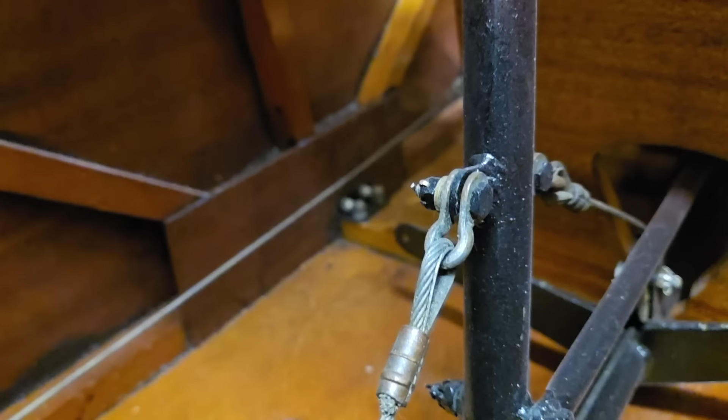This airplane was designed in 1929 by Bernard Pietenpol. And he actually built the airplane with pretty much all common parts that you could buy at the hardware store, things like that. Get the steel tubing. All the controls are welded up yourself. So when you get the plans, they give you dimensions. And with that being said, you weld it up and rig it just like the plans show. And this is what it would look like.

So, instrument panel here for the pilot, as you can see. Here's the seat. Pretty cool, huh? You put a little cushion on there. You can't get too much in there, to be honest with you.

One thing that's unique, or good, I think Jim put these shoulder harnesses in. It's nice to have something like shoulder harnesses in these airplanes. Just because if you have an off-field landing or something kind of hard or difficult, it's going to probably save your head from hitting the instrument panel.

The airplane's made out of wood, so now you can use like T88 epoxy glues, but everything's glued together, and then they put these gussets. And you see these little nails, these are called brads, okay? But they glued it together. And this is a 1970 build.

What happened, the prop came off the Model A, and Dick had to make an emergency landing out in a field. The field, I guess, was going downhill, and the airplane glided more than he expected because the propeller wasn't there. And with that being said, he landed a little bit long, and it tore the gear off. And really, this part of the airplane was damaged quite a bit.

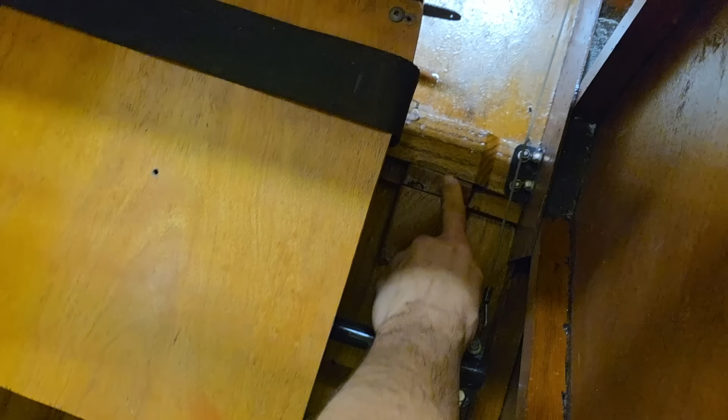The pilot, as you're flying the airplane, the pilot's feet come through here. I'll turn this around here. So your feet come through here, and here's a rudder bar. And the rudder bar is for the main pilot. And look here, they got like a little shim here, so you don't get your heels caught on the landing gear block. So it slides back and forth a lot easier.

It's pretty amazing, in 1929 they come up with this airplane. Here's the back of the instrument panel. I'm going to go a little bit more in depth with this than what I thought I would. But here's all the instruments, and then you'd run all the cabling and the tubes and everything to the engine or to the pitot-static. Let's go around here and take a look.

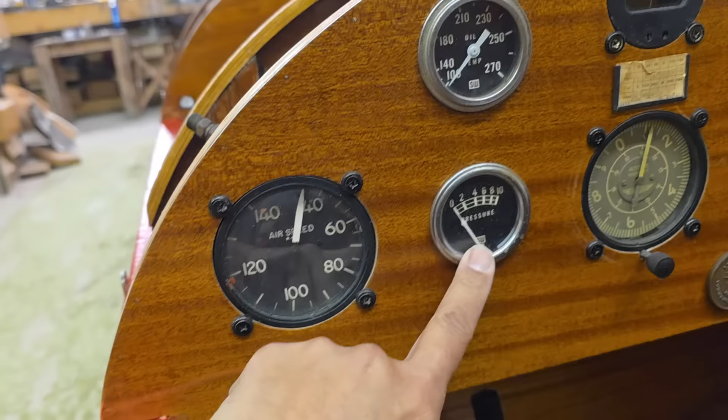We've got our compass, our magneto switch, oil, oil temperature, oil pressure, okay? And then here, since we got a Model A, you got to have water temperature. All right. We got our altimeter here, our airspeed. All right. And there is the almighty RPM gauge.

So it's really a unique plane. It's small. It's a home built. Jim did all the covering here. Come back here. This is the stabilizer on it. It's pretty much a flat surface. We'll bolt through, and then the rudder sets on top. Tail skid. All this looks like it's pretty much built to plans.

A lot of guys are putting tail wheels on it, and a tail wheel, in today's world, makes it more convenient. But if you're flying off of grass, a tail skid is perfectly okay. And around here, we kind of fly off of grass a lot. With that being said, you keep the weight down. Pietenpol is kind of known to be tail heavy. So you really want to keep everything light on the tail section. And having a Model A up front really helps out.

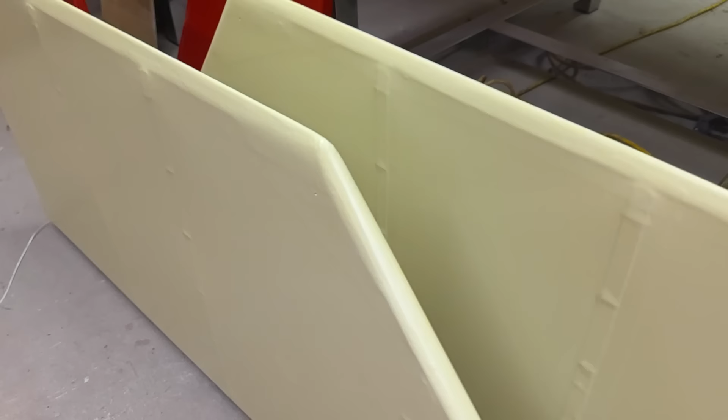Here's the elevators. So Jim put all these back together, tore all the covering off. Here's the control horn for the elevator half. And he covered all this in Stits Poly-Fiber. Here's the fin. I'll back up here so you can see it. There's the rudder.

And what's kind of funny also is I started building a Pietenpol. I had the tail sections done, and I framed up the fuselage. It's actually pretty easy to build and very fun to build. You just put all this stuff in a jig, just like a model airplane. Glue it together and come back the next day and glue some more parts and pieces in.

Here we go. Here's all the cabling for the elevator and the rudder. You see all his tapes here. So anytime there's something touching the fabric, you gotta have a tape on it. So he has these little double tapes or pinking tapes on here.

Here's the front instrument panel. There's nothing there, but a piece of metal will go there. This is where you have the struts go up to the wing, attaches here and here. So Jim said he's going to paint those. Here's the landing gear brackets and also the flying struts, or the struts for the wing. So the landing gear will bolt to this one and that right over there. Pretty cool stuff.

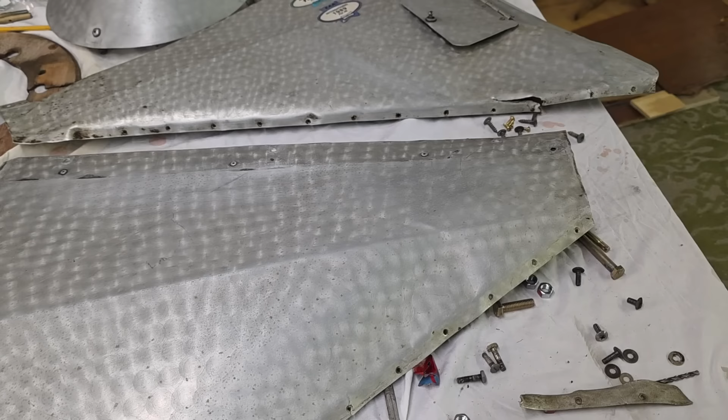So we just put this stuff together just so you can see what it looks like here. So he'll get the bolts and get everything all tightened up and fit it up a little better. So I'm going to move over here and show you the cowling. I didn't have any pictures of it before, and I don't think Jim took any, but he said all this was really beat up pretty bad. Wrinkled aluminum. But Jim did a lot of work with it and beat it, and said he stood on a couple pieces. And if you ever met Jim, he doesn't weigh a lot, so he probably had to do some jumping up and down on it.

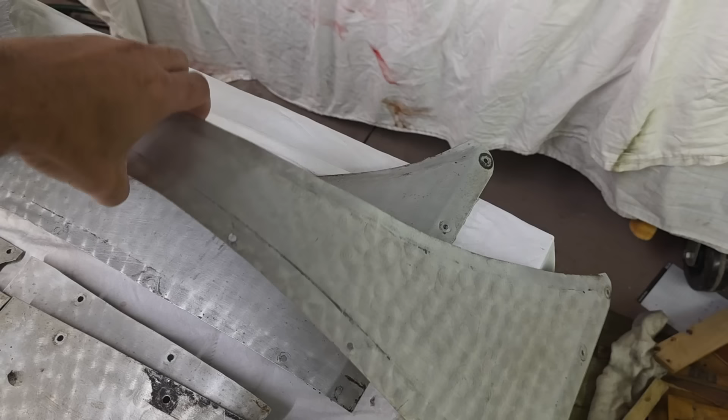And these are just the metal pieces that he actually just worked and fitted back. So these are original here. This is the back of the back cockpit, and it overlaps. Gives a little tapered look there on the instrument panel. Very front nose of the airplane. Here's a piece that was broken. So Jim laid these out here, turnbuckles and things that were broke during the accident.

So I graduated high school in '94. So this had an accident 2 years before I graduated high school.

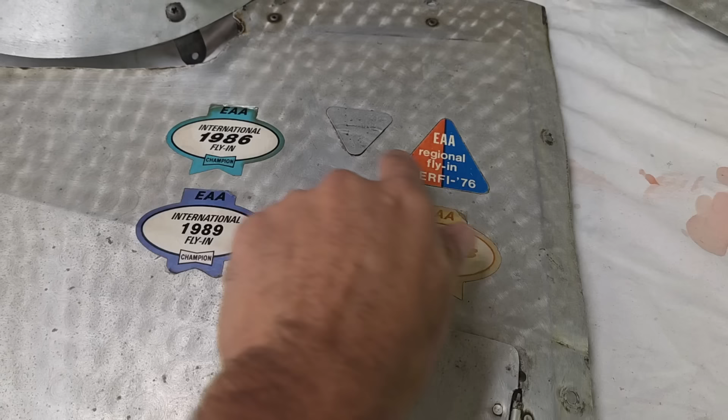Here's some pretty cool stuff he had on the side of the cowling. This is EAA Oshkosh. But look at that, 1986. I never knew it was called International Fly-In. And then this is MERFI. This was up in Marion, Ohio. When I was a teenager, MERFI was called Mid-Eastern Regional Fly-In. This was one of the largest fly-ins in the area.

They had a humongous air show, awesome display of antiques and home builds. It was a very experimental type fly-in back then. This is back between '90 and '94 when I would go there. Two of my friends that we flew with in high school, we would go there. We started going before we could drive, and then in high school we would drive there and spend the whole weekend camping out and everything.

So it was an awesome fly-in. And then I don't know what happened, and the fly-in now is being held in Urbana, Ohio, but it's nothing like it used to be. So Jim had this laying out. This is some of the broken wood. You see this was in the cockpit there. This is where your feet would go through. It's all broken, and Jim had to rebuild all this and remake everything. Look at that.

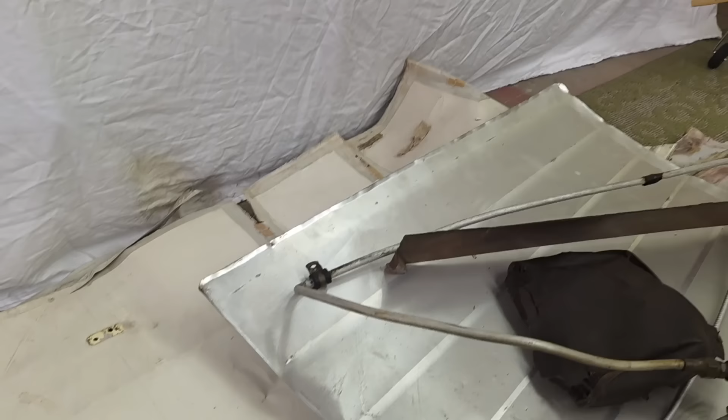This looks like this is possibly the very top of the fuselage. This piece is probably right there. I think that might be it there. So he put it all back together, instrument panel. Here's some of the old fabric. This airplane just sat in the back of a hangar or up in the loft for many, many years. I remember years ago going over to Dick's hangar with Jim, and I'd see the airplane hanging up there or sitting in the back of the hangar. This is probably all Ceconite and dope fabric here, but this is what it was.

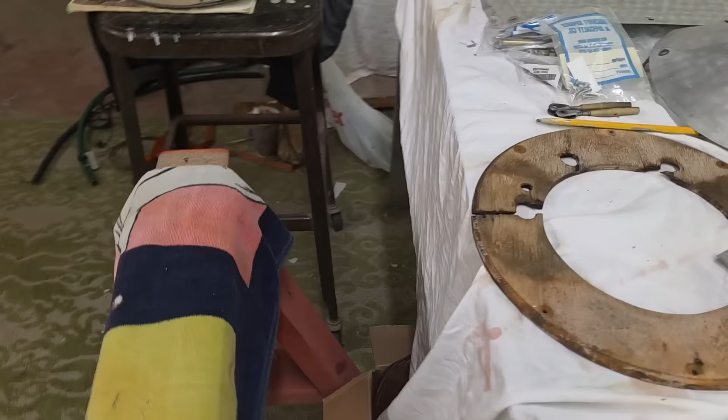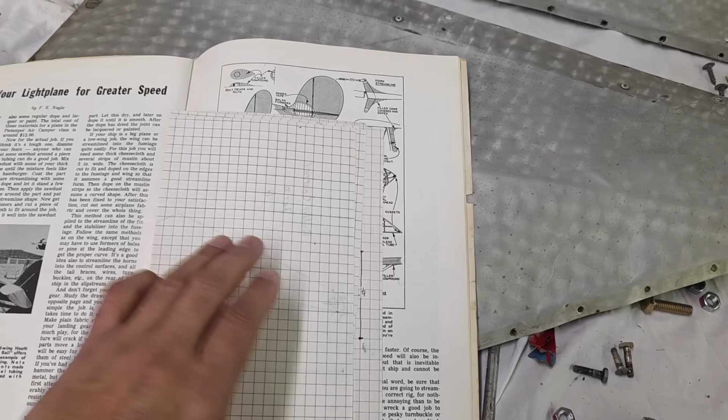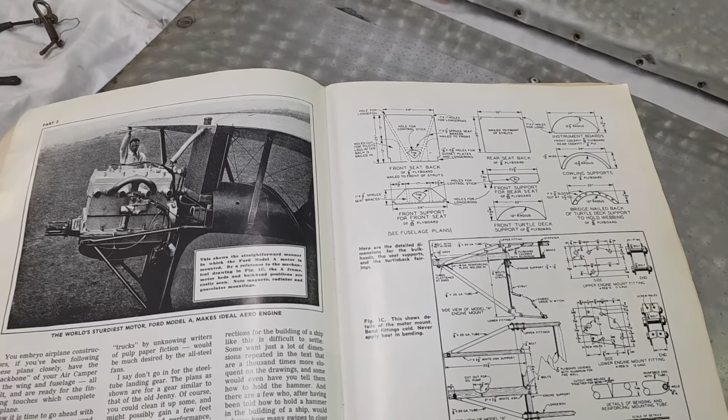And I think we're about done. Here's some cool stuff here. This is like the instruction manual, the Holy Grail for the Pietenpol Aircamper. You can order these online. 1932 Flying and Glider Manual, and you can actually go and buy this. It's not that expensive. I just opened it up here, and it looks like Jim has some notes. It features the Pietenpol build, and look at that. That's pretty cool. I have this book at home, but it's been many years since I've looked at it. A lot of really cool small airplanes. So here we are with the Pietenpol build.

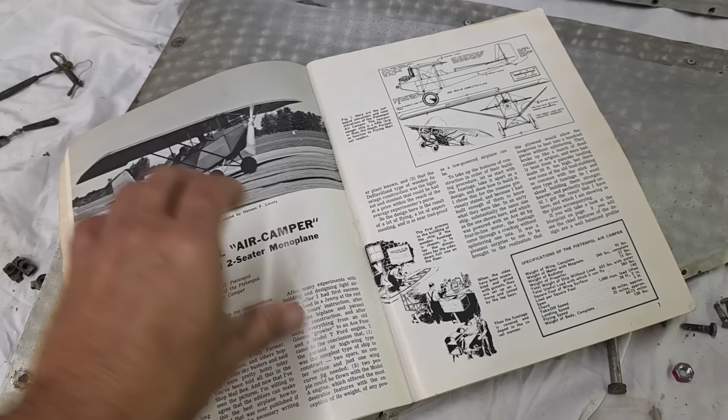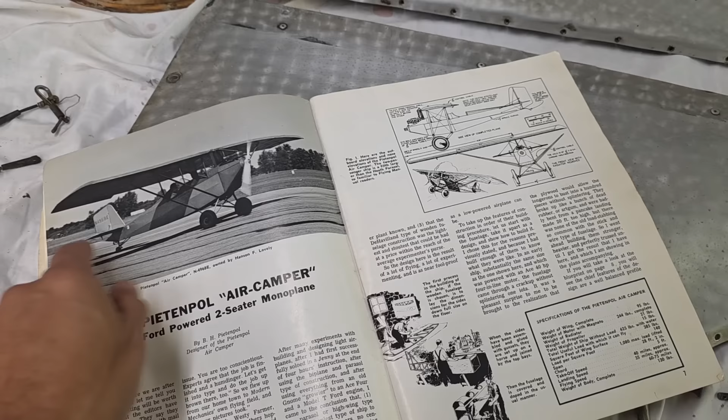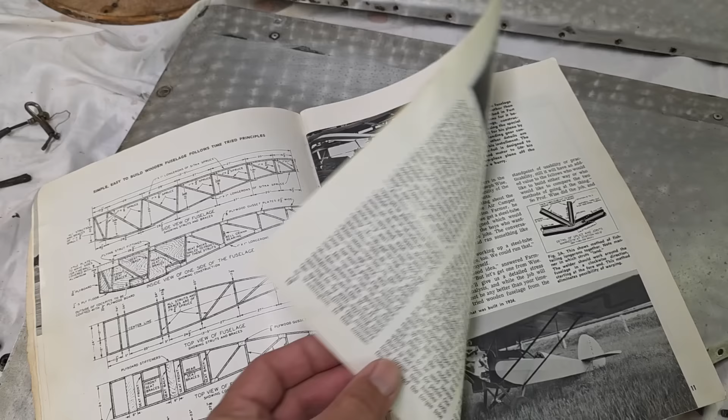I'm not up on the Pietenpol like I used to be. But what was unique about it, I might be misspeaking, and I'm sure someone will correct me, but I believe there was a big show happening maybe in Chicago, and they were supposed to have some pilot show up, and they never did. And Bernard showed up, I think with 2 Pietenpols, and they didn't even know he was going to show up. He kind of wowed the world with this airplane. This is what it would look like originally. They've had multiple different engines put on the airplane, Corvairs, radial engines, but it was designed around a Model A.

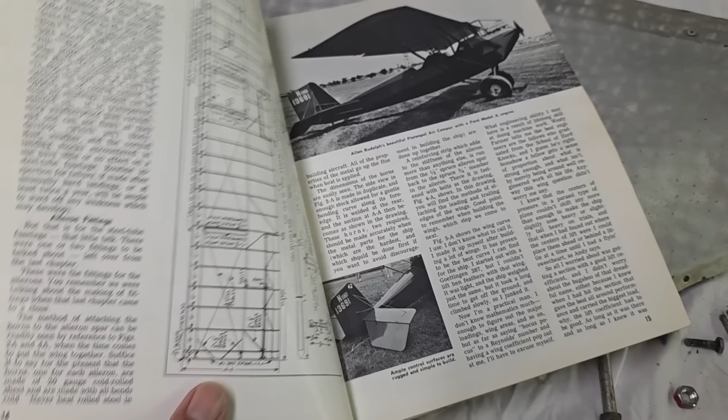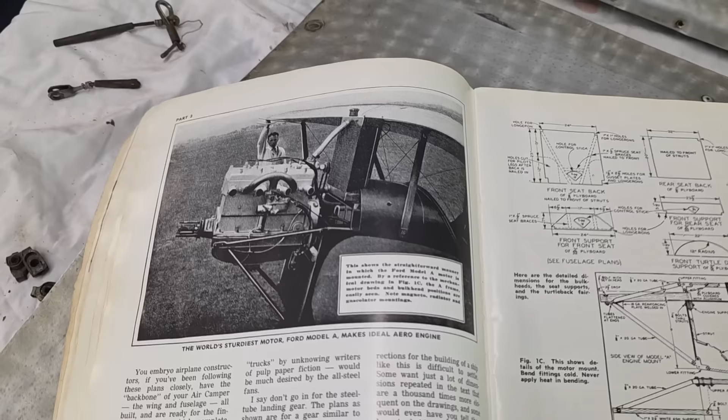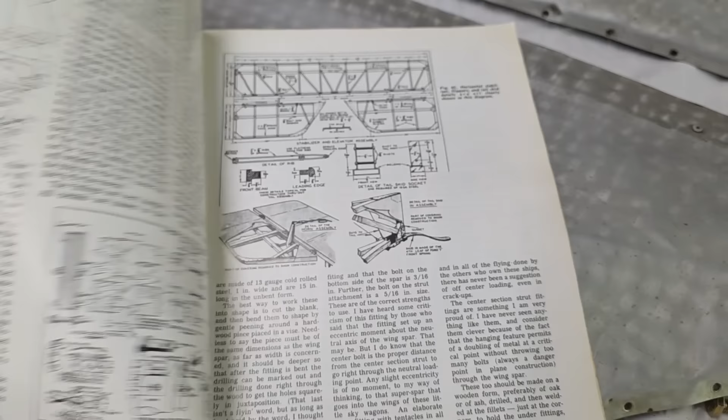This is what the plans would look like. It teaches you how to build it and what needs to happen. This is showing a steel tube fuselage. And I believe this is, yep, that's Allen Rudolph's Pietenpol right there. Just had a guy contact me over in Indiana. He personally has pictures with the Allen Rudolph Pietenpol from many, many years ago, and he wants to bring them over and hand deliver them. Yep, here's the engine mount. That's what it looks like. This is a really nice read. Looks like it's over 10, 12 pages of the article.

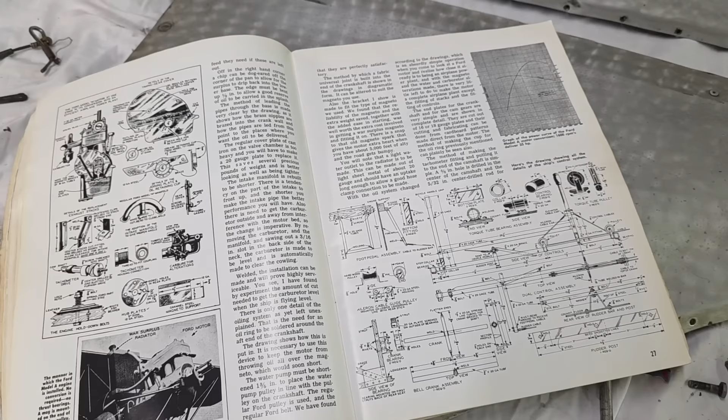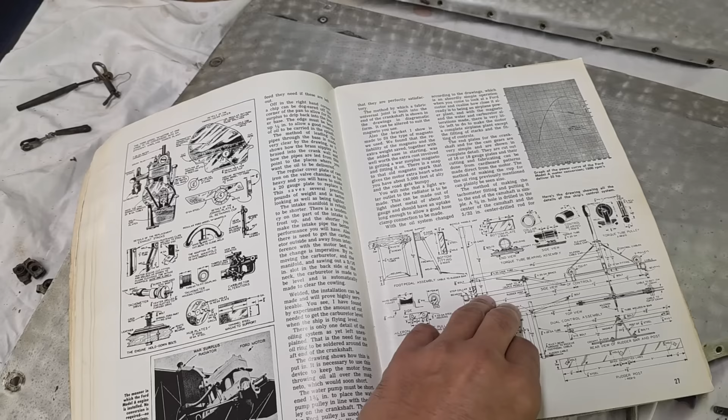And another thing, there's the Pietenpol Aircamper, and then they have a Pietenpol Scout, which is a single place. This is a really nice article. It's been probably 20 years since I've looked at this, but it shows you how to convert the Model A engine into an aircraft engine. The back of the engine is the front where the prop connects. Take a look. I'm not sure where you can buy these anymore, but maybe Aircraft Spruce might still sell them. Amazon, probably only a few bucks. eBay for sure. There's a lot of cool airplanes and plans in here that you could have a little fun and dream about.

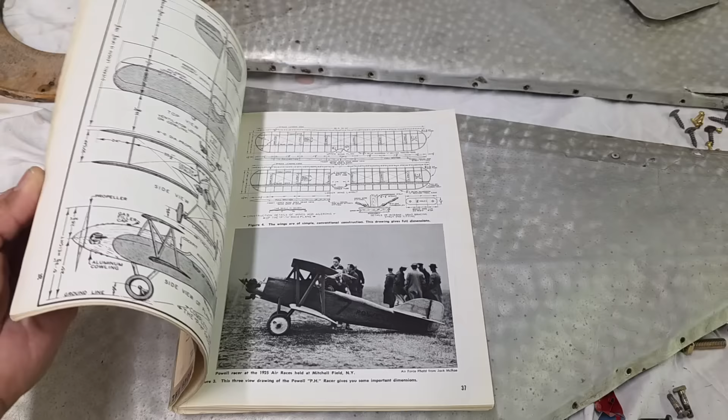Look at that little thing. It looks like a model airplane. So this is a Powell P.H. Racer.